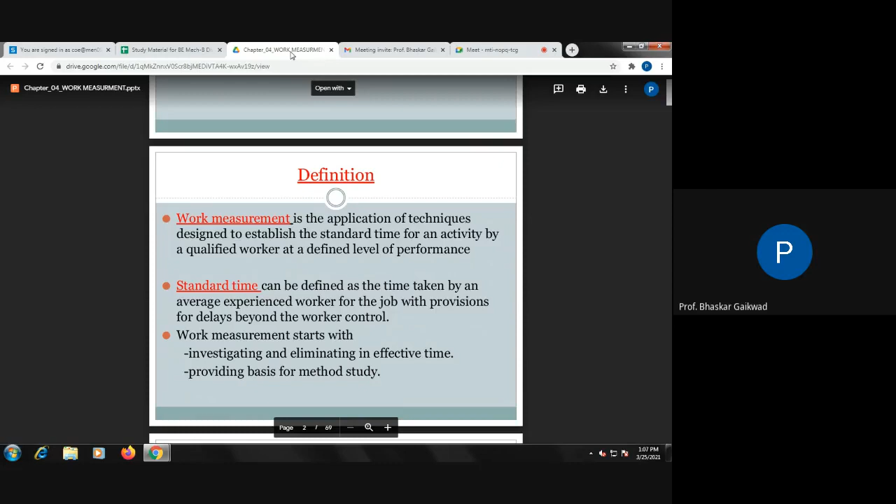So it can be defined as the time taken by average experienced workers. Means you have to give one job to the worker. That worker must be a qualified, experienced worker, and his level of working is 100%. While doing this particular work, you have to measure or calculate this time.

Main objective of work study is to reveal the existence of ineffective time, if any. The downtime or waste time we have to compensate. Set the standard time for carrying out specific jobs and the standard output level. Means, if you set the standard time for this job 1 hour, this job 2 hours, this is the standard, calculated time. Accordingly, you can give work to the workers to complete the job as per the standard time.

So applications: we can use it for estimating the cost, salary, machinery, equipment; whenever we have cost related problems, we can make use of the standard time. Financial part we can decide on the basis of this, incentive bonus systems, then production planning and control purposes also. Then where we can apply work measurement: it is widely used where work is repetitive. If mass production is there, we can make use of this.

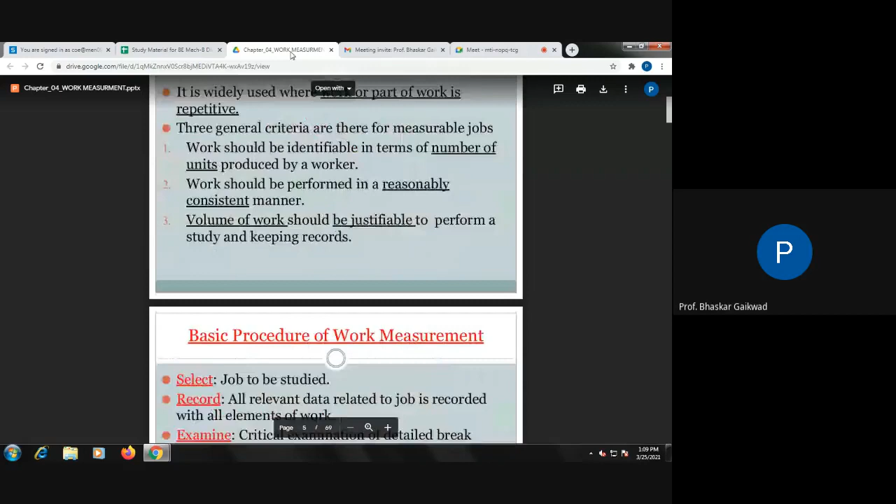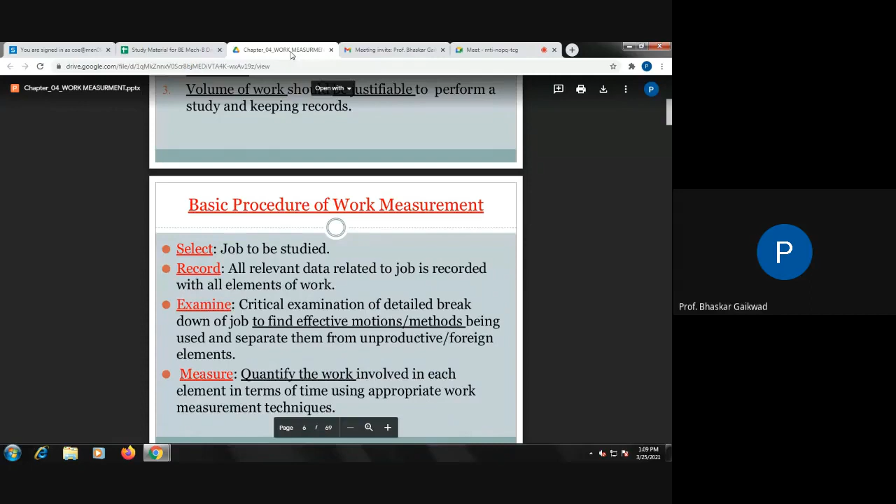Next, the three general criteria for measurable jobs: the number of components produced by the workers, the worker should perform in a reasonably consistent manner, then volumes and keeping a record of the same. After this, the basic procedure: you select the jobs to be studied as usual in method study, record the existing methods, critical examination, measure with qualified workers, then compare with the basic. After that, install it, and after installing you have to record this.

So after that we came to the next part, the techniques of work measurement. But before that, once again I will repeat what we have studied in work measurement. What is the definition of work measurement? Then what is the objective of work measurement, and what is the basic procedure for work study? And after this,

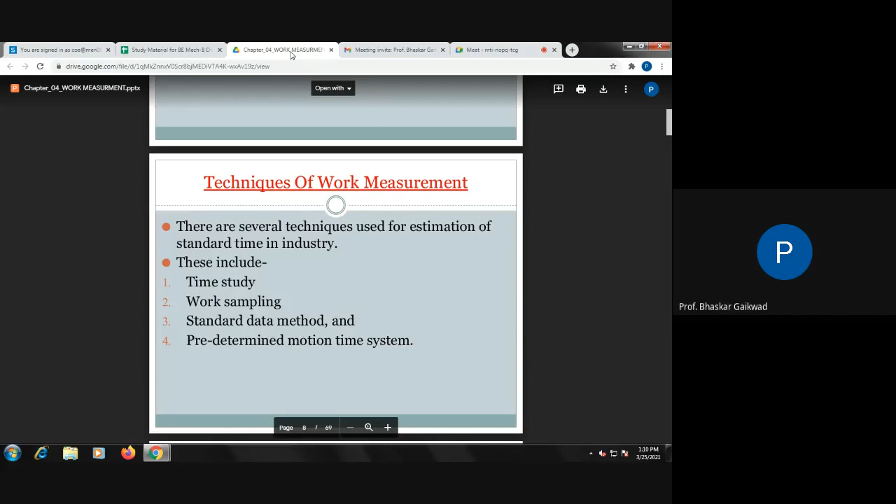the next part, that is the techniques: time study technique, work sampling technique, standard data technique, then predetermined motion time systems. So here in time study we can use the stopwatch system. Work sampling we can use for mass production. Standard time method is there. Analytical methods might be there. Then predetermined motion time systems: each motion time has already been decided, and we can use that for this.

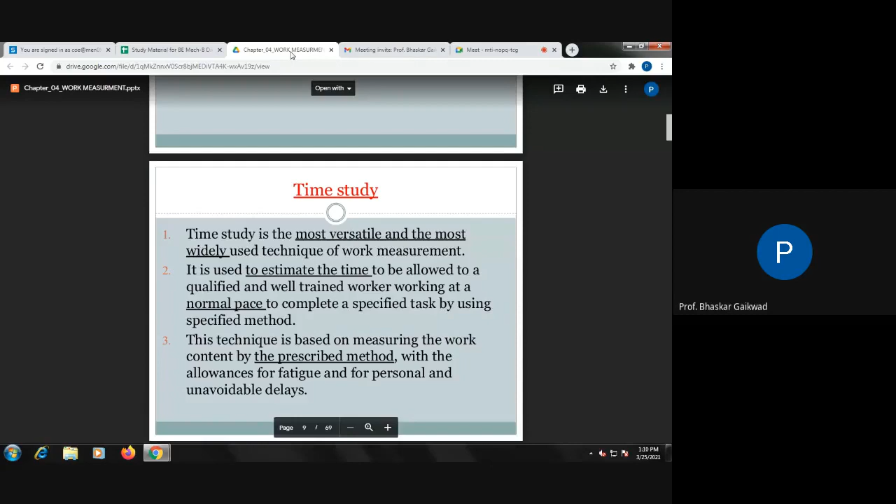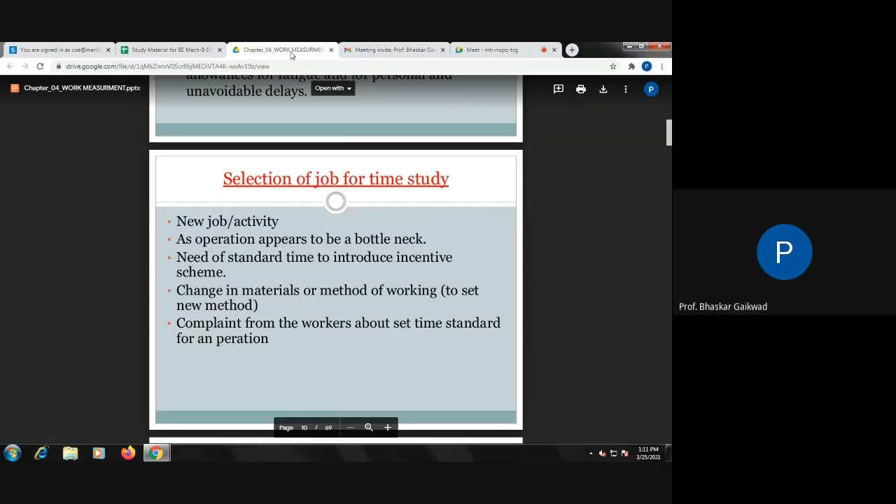So here in time study, two types of watches are there. With the help of this we can measure the observed time. So here, the selection of jobs to be studied, where we can select jobs for work measurement: new activities, mass production, some problem in production, need to decide the salary of the workers, changing the materials, complaint from the workers. Whenever a critical part is there, we can make use of this time study.

Normally we can use this time study for new jobs or new activities, or when in production there is a problem. Whenever a problem is there we can use time study. Then if you want to introduce an incentive system, bonus system, need of standard times, sometimes if you want to change material and methods, then this time study is required.

Complaint from the workers about the set time standard for an operation. Suppose a knurling operation is there, slow time is there. Then in taper turning, slow time is there. But as per standard time, the given or calculated time is less, then there may be a complaint from the worker. And under this situation, we can make use of the time study.

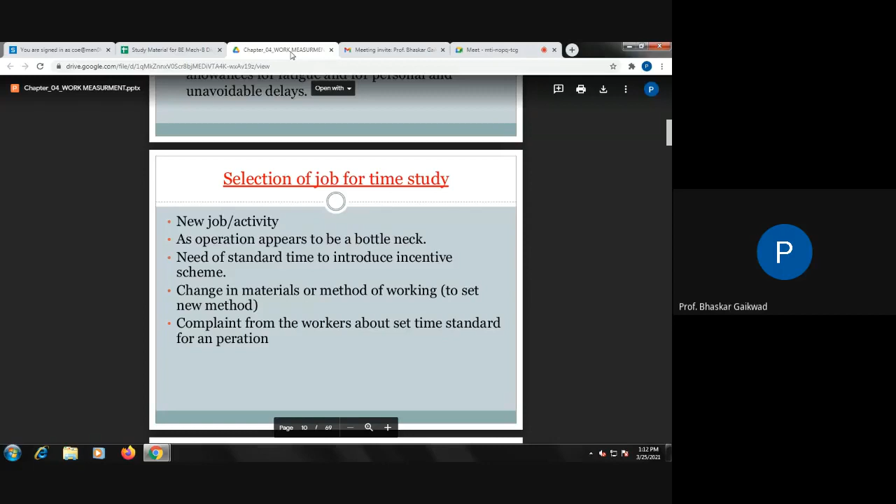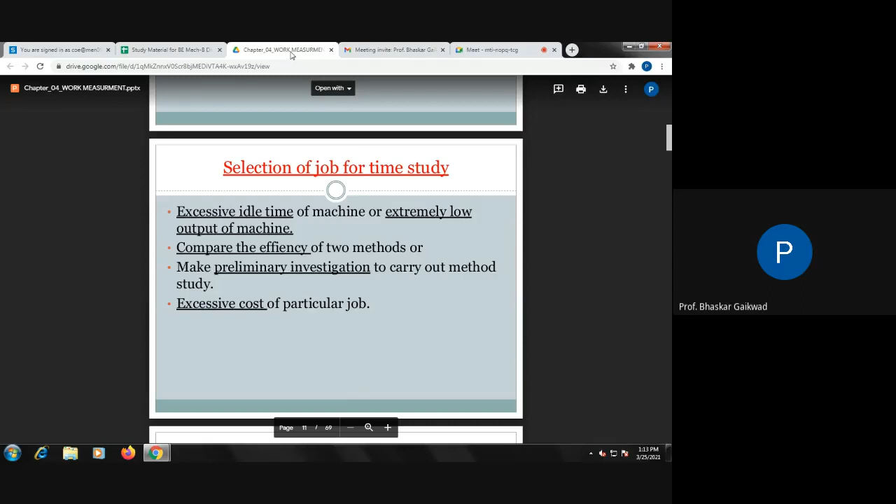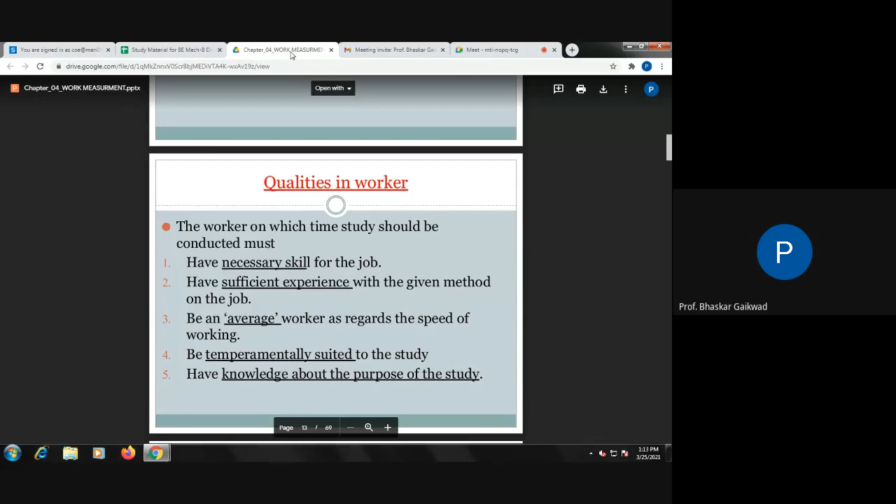Selection of the worker for time study. Selection of worker for time study is a very important factor in time study. He should be skilled, experienced, high level of performance should be there. Quality of worker, skill should be there, sufficient experience should be there, temperamentally suited to the job, knowledge about the purpose of study. So skilled person, experienced person, and knowledge about the time study - such persons are required in the time study.

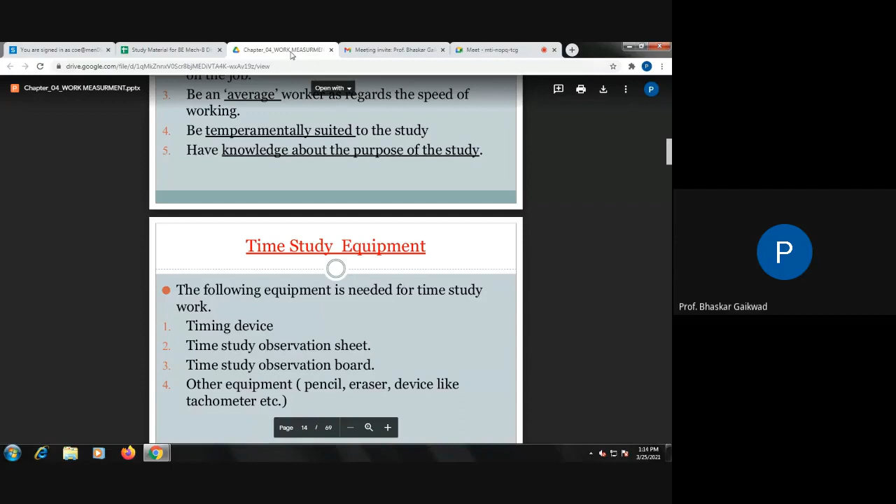Time study equipment, time study devices. That is our stopwatch, observation sheet, time study observation board, equipment like pencil, eraser, devices like tachometer.

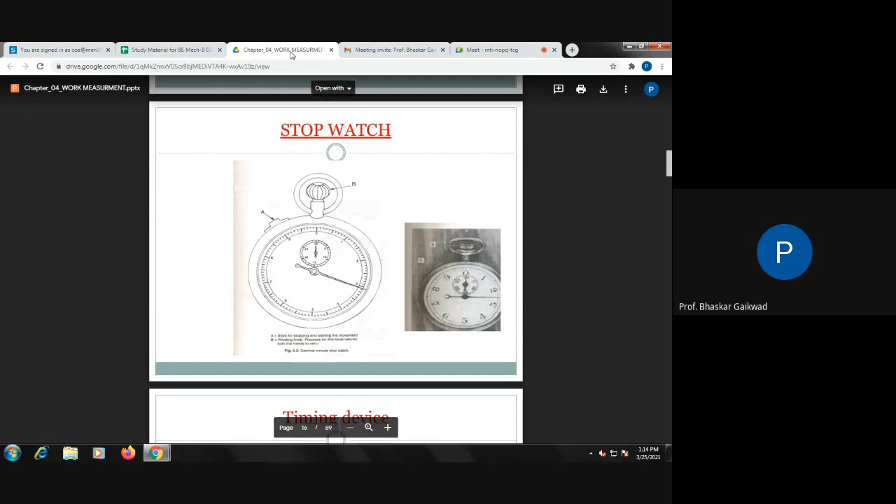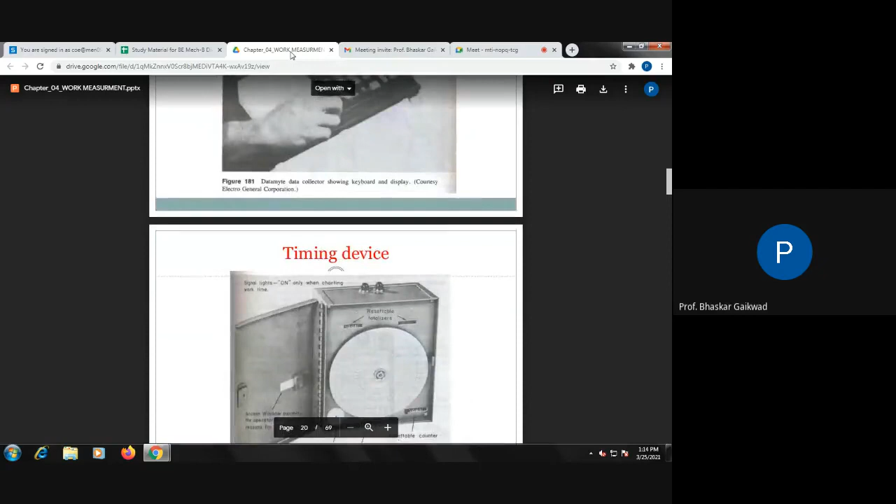This is the digital type. This is the timing for predetermined motion study. This is also a digital timing device. Sometimes this is the time study sheet.

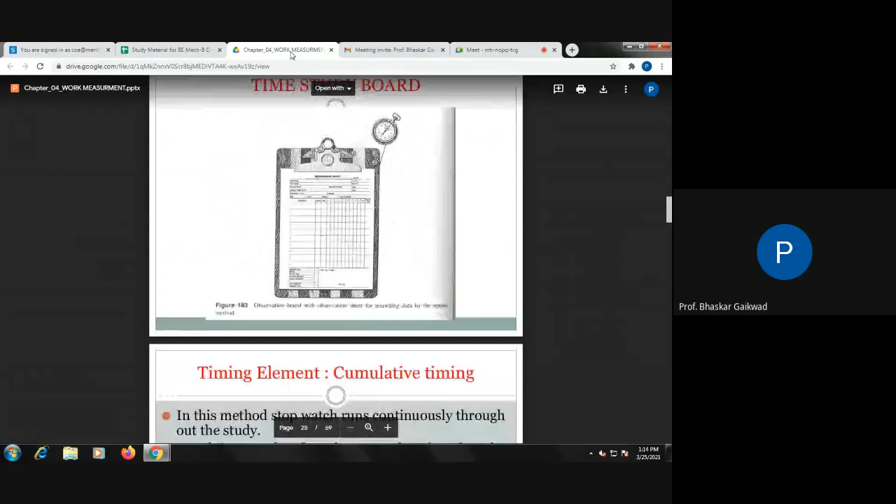Already we have recorded, we have gone through this cumulative timing. Sometimes while taking the reading, the pointer will move. Once it moves, that activity gets over, then it will come to zero. Sometimes from that point, cumulative readings will get measured.

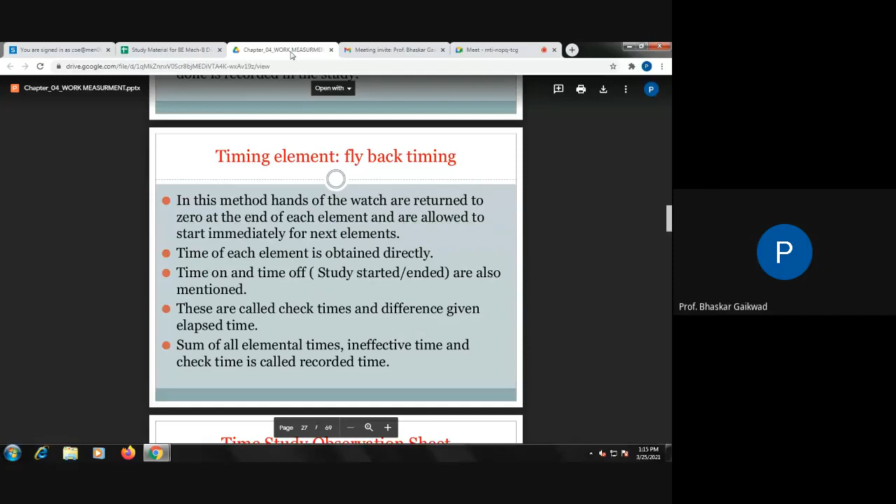Flyback. In this method, hands of the watch return to zero at the end of each element. Once it is over, then it will return to zero.

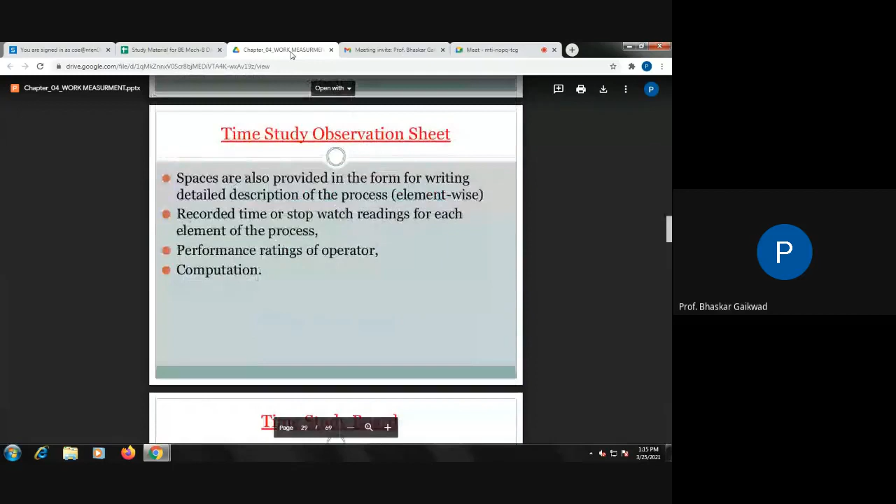So like this, time study observation sheets, drawings, etc. are required in time study. Observation sheet is there already - I have shown this procedure already. We have shown this related job.

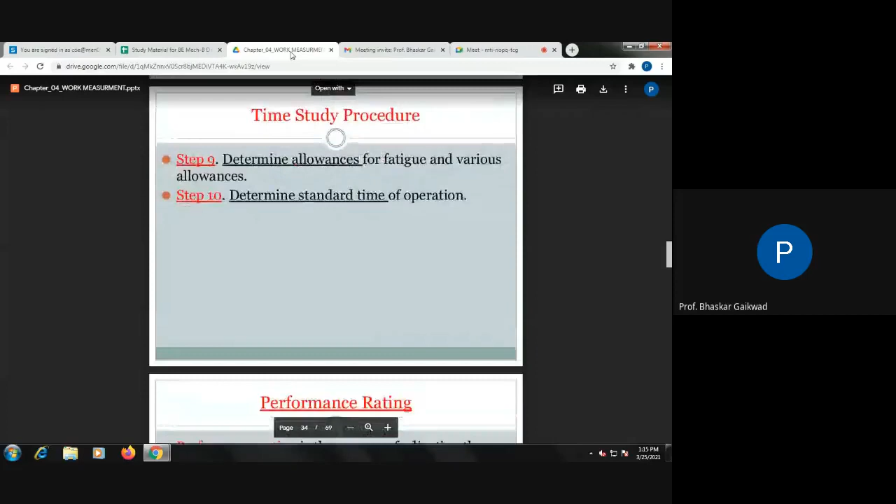Okay, so now we came to performance rating. In short, what we have studied in last lectures: definition of work measurements, then where we can do these work measurements, what is the procedure of work measurements, what are the basic techniques of work measurements. This part we have already covered in the last lecture.

The definition - it is one of the techniques for measurement of standard times by a qualified worker, an experienced person, high level of performance. Main objectives are cost estimation, incentive, production planning and control, to avoid bottlenecks, to remove downtimes in industry, bonus system is there. For this purpose, we require work measurement.

And the procedures - first you have to select the job. After that, you can go for the questionnaire or measurements related to these jobs. Once it gets compared with original and new methods, we can install and record what is the output. This is the procedure.

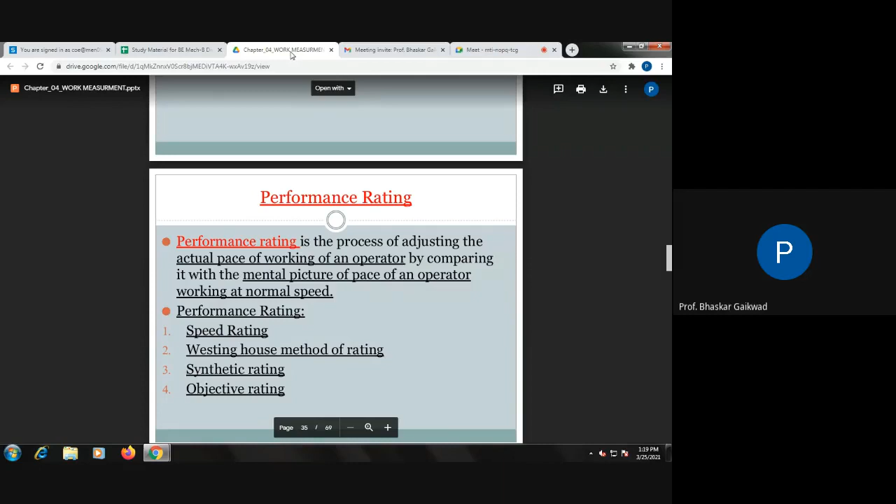So sometimes depending upon objective, depending upon analytical methods, depending upon speed of working, we can decide the performance. But we have to suppose an ideal man, and his performance is 100%. So this is the performance rating.

For example, if a man is doing a job on a lathe machine for 1 hour, one skilled, experienced person working at normal speed will complete 10 jobs. If nobody makes more than 10 jobs within the 1 hour, then we have to suppose that person has 100% performance.

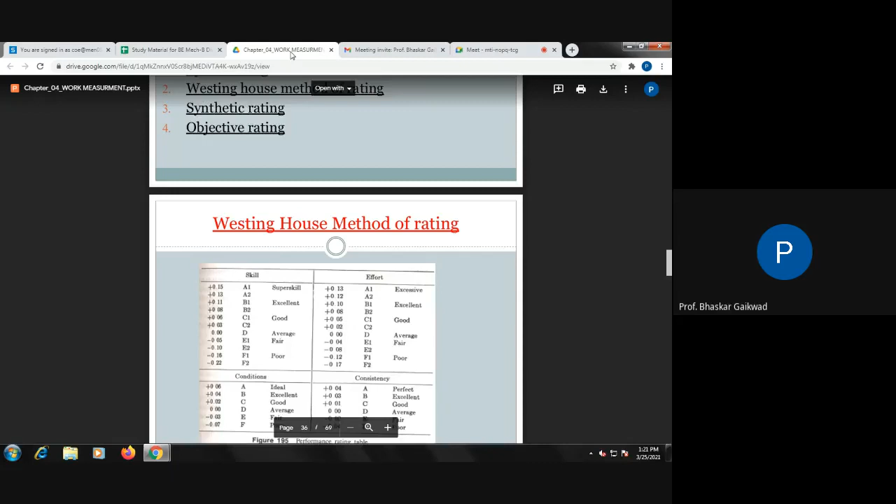This sheet shown on screen is not that much important, but industries make such sheets while calculating performance: poor, fair, average, good, excellent, super skill, like this. Some points are actually required in industry.

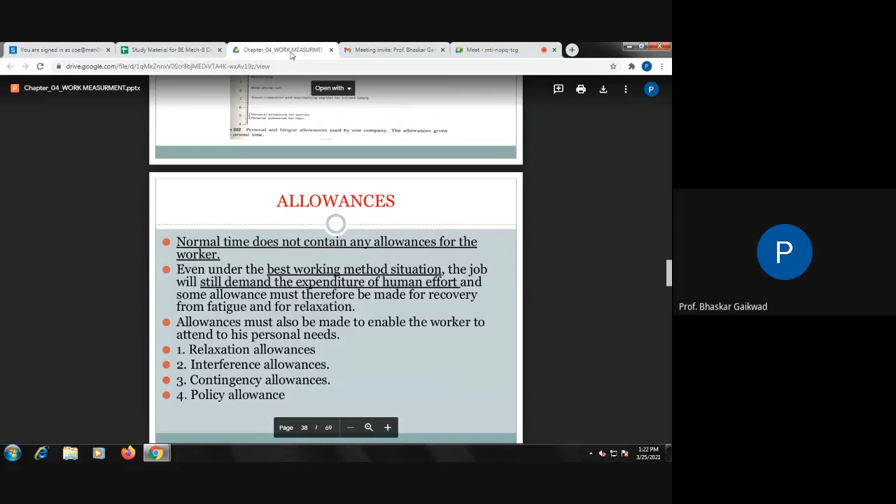This is also about personal and fatigue allowance. So many allowances are given, though it's not actually visible here. After this, on the same page, whether in small handwriting or printed copies, below this the same thing is there: allowances.

So first we've seen the performance rating. Performance rating depends upon the skill and experience of the workers. We can decide the performance rating. The ideal person having good performance, we suppose has 100% performance rating.

Now, in order to calculate the standard time, as in the last lecture, we can use the stopwatch method for mass production level problems. Whatever time is measured by stopwatch is the observed time. If you multiply the observed time by the performance rating, always in percentage, you get the basic time or normal time.

If we add allowances to this, what is allowance? It means extra time given to the worker to fulfill their personal needs. Sometimes power in the industry gets cut, and that time gets wasted. To compensate for this time, we also consider it while calculating standard time. Some management groups have meetings, etc., so policy allowance is also required. So allowance means the extra time allowed to the worker while calculating standard time. Many allowances are there.

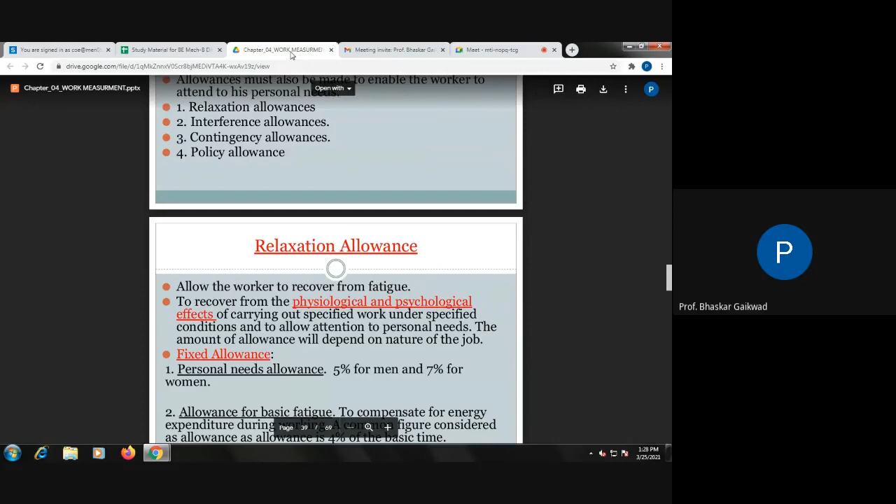Allowance for basic fatigue, to compensate for energy expenditure in the work - the common figure considered as allowance is 4% of basic time. So fatigue allowance, how much we actually require, that is 4% of basic time or normal time.

And how to calculate basic time or normal time? Observed time multiplied by the performance rating. So basic time or normal time, once again I will repeat, is equal to observed time into the performance rating. Okay, so once we calculate, it becomes normal or basic time.

In percentage of this, we can add the allowance - maybe personal allowance, fatigue allowance. Fatigue allowance is normally 4% of basic time.

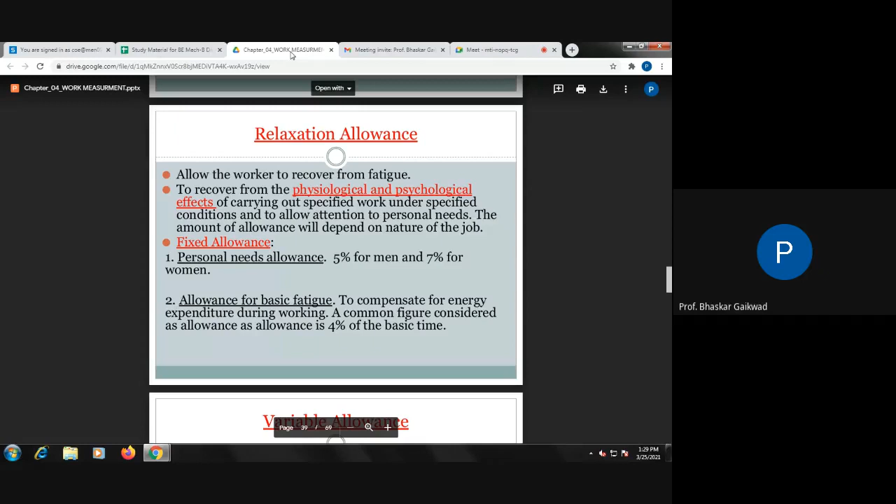Variable allowance is allowed to operators working under poor environmental conditions. Those workers working in poor environmental conditions - heat treatment, foundry conditions that cannot be improved - have added stress and strain in performing the job. Heavy lifting, forging, casting, heavy machine jobs are there. So here variable conditions exist, and we require certain variable allowance.

Variable fatigue allowance is added to the fixed allowance to compensate the operator who is engaged on medium and heavy jobs working under such conditions. The amount of variable fatigue allowance varies from organization to organization - it is 2 to 3% of basic time.

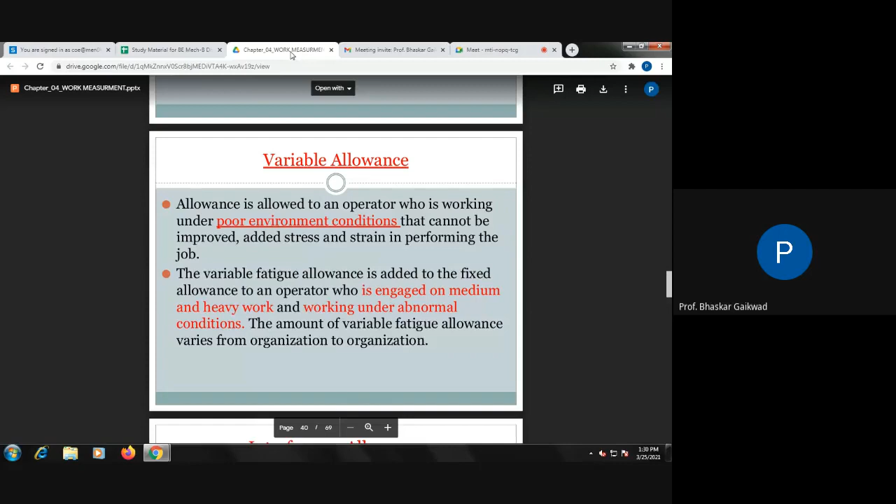Sometimes the environmental conditions will get changed in the organization. Depending on the opinions of the top management, we can allow this allowance.

Interference allowance: work content of job to compensate the operator for unavoidable loss of production due to simultaneous stoppage of two or more machines being operated by him. Suppose 4 or 5 machines are there and one man is working on those machines. So the third machine will get stopped, and the fourth and fifth will not work unless the maintenance work gets done. Under such a situation, we can add interference allowance.

Interference means there is a problem - suppose one worker is operating 2 or 3 machines and one machine stops working. It is not the fault of the operator, it is the fault of the machine. So here the operator cannot do anything. This time actually comes under the interference allowance.

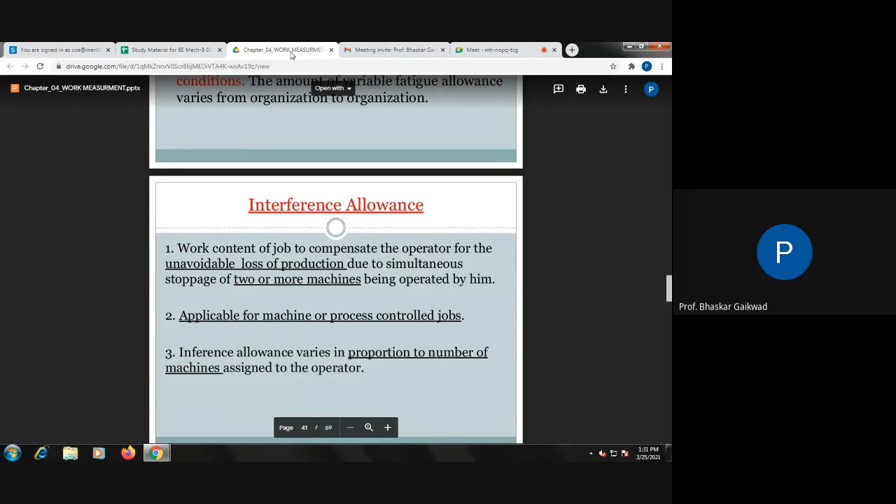Applicable for machine and process control jobs. Interference allowance varies in proportion to the number of machines assigned to the operator. This is also dependent on management - maybe 2 to 3% interference allowance.

Then contingency allowance - that means unpredictable, immediately without any intimation, the work will get stopped. So this is called contingency allowance. Power getting cut off - this is contingency allowance.

Then sometimes there is a force from top management to stop and come for a meeting - unpredictable things will happen. Then it is called contingency allowance.

It's a small allowance of time to meet legitimate and expected items of work or delay, precise measurement of which is uneconomical because of their infrequent or irregular occurrence. This is an irregular occurrence - small unavoidable delay as well as occasionally minor extra work.

Unexpected things will happen - this is the contingency allowance, and it should not exceed 5%.

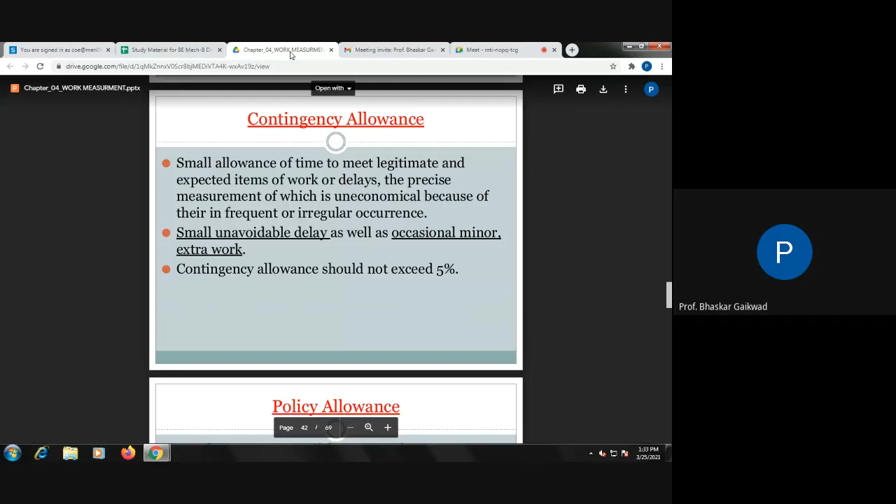So contingency allowance is 5%. If you are deciding the standard time for a job, power may get off or not, even so we can consider 5% for unexpected things happening - unexpected events that are not in the worker's hand. Examples already given: power may get off, how will the worker work? So this comes under contingency allowance - it is 5% of normal time.

Policy allowance. Now this policy allowance is actually a management allowance, not a genuine part of the time study. It is not added in the standard time. Sometimes questions will be there asking which allowance is not added in the standard time. So policy allowance is not added in the calculation of standard time.

It is used to line up the standard times with the requirement of wage agreements between the employers and trade unions. So we require this policy while deciding the salary or wages system, when there is a need of discussion between the employees and top management or trade unions.

A policy allowance is an increment, other than bonus increment, applied to standard times to provide a satisfactory level of earnings for a specified level of performance under exceptional circumstances. The policy allowance we normally use for incremental purposes, bonus systems, or the additional things the workers get in the financial part. Then we can say there is a policy. It actually depends upon the management. It is not related to standard time.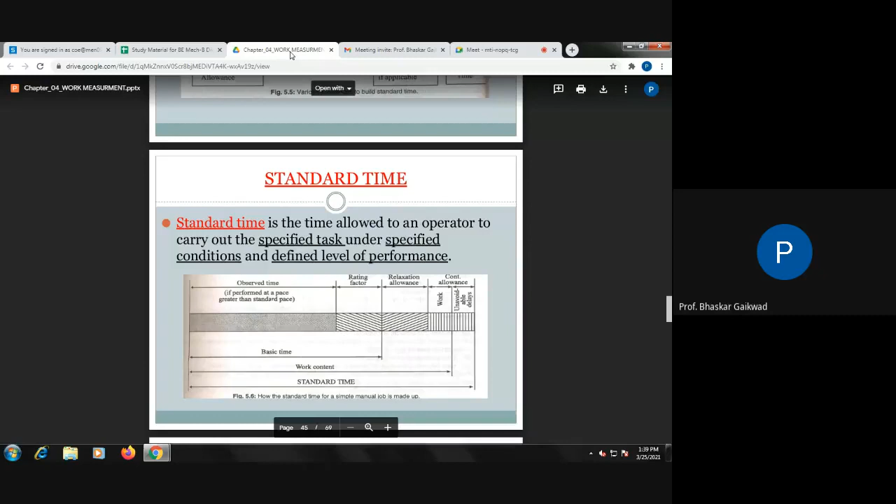Here observed times and rating are given, and after this come the problems. But before going to the problems, once again we go back and we'll see

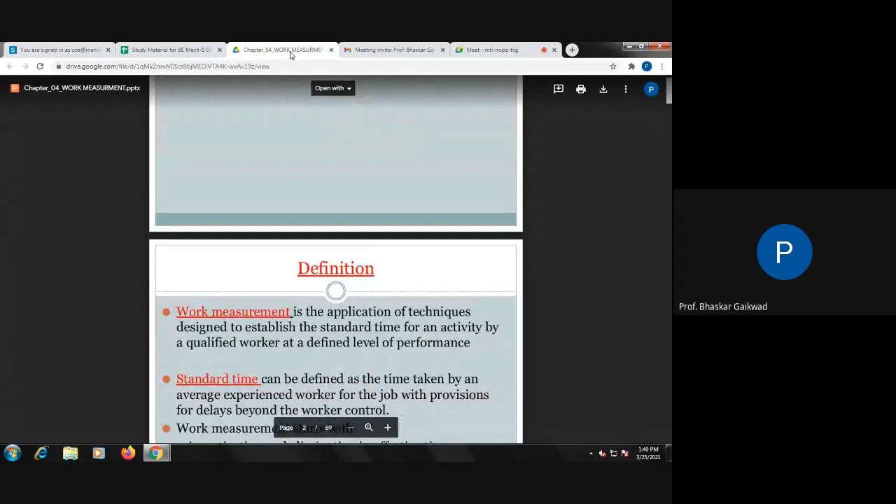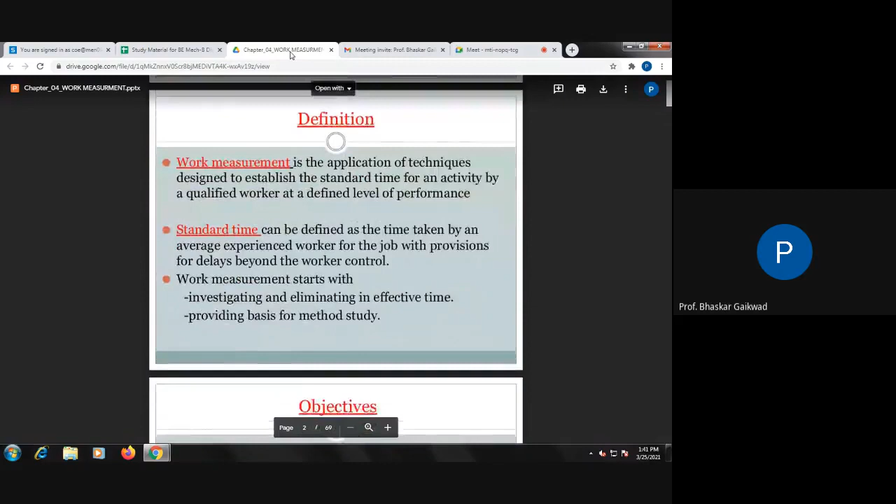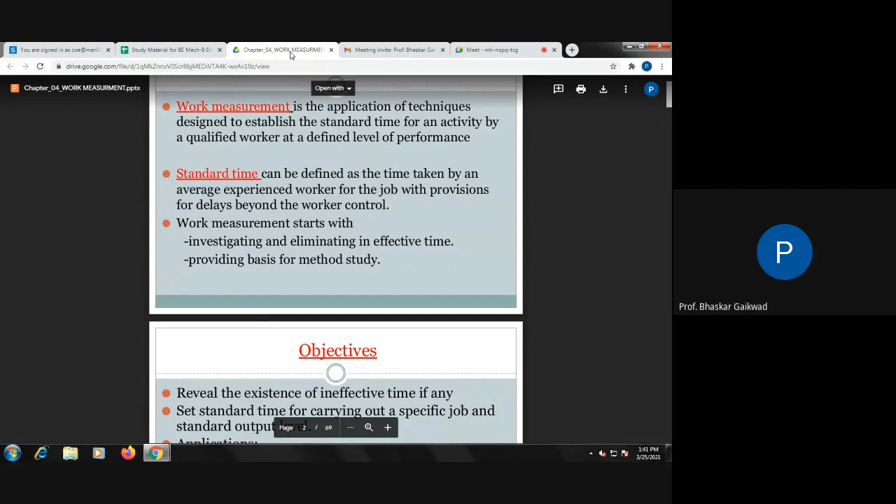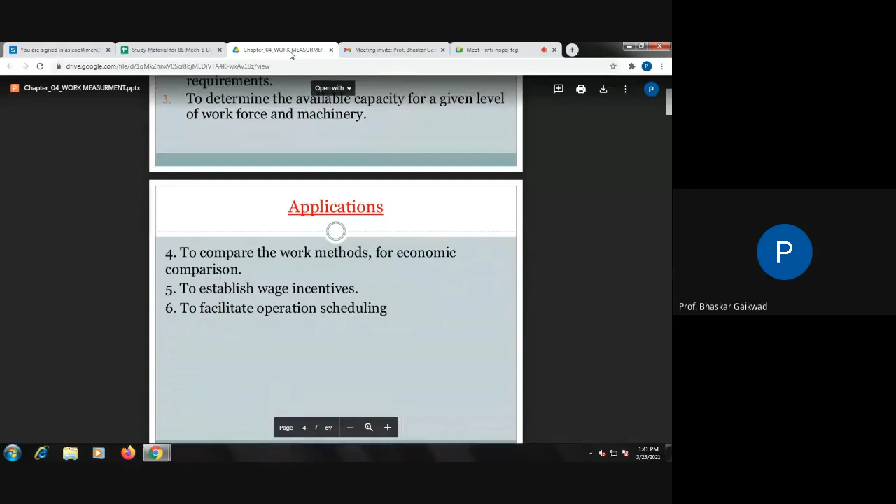the definition of work measurement, then standard time, and the objectives. Very simple objectives: we require it for cost estimation, to decide the salary of workers, to avoid bottlenecks, and to establish new methods. Okay, so these are the objectives. For economic comparisons and break-even analysis also we require this.

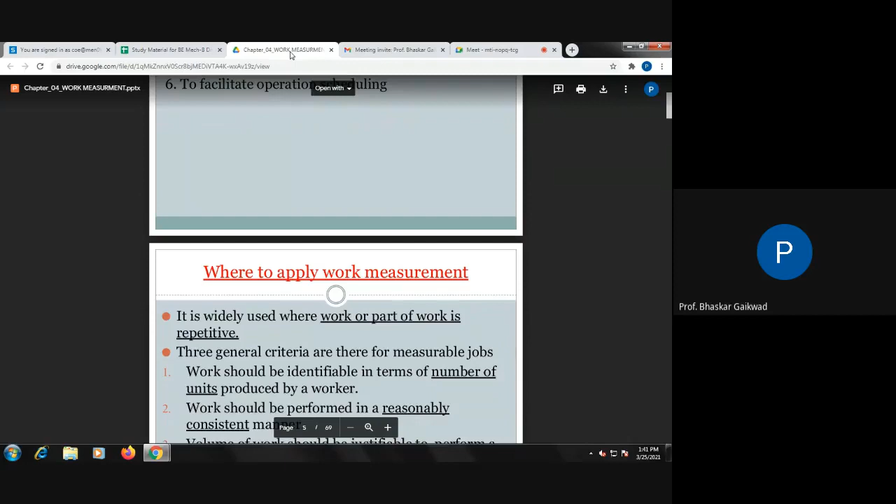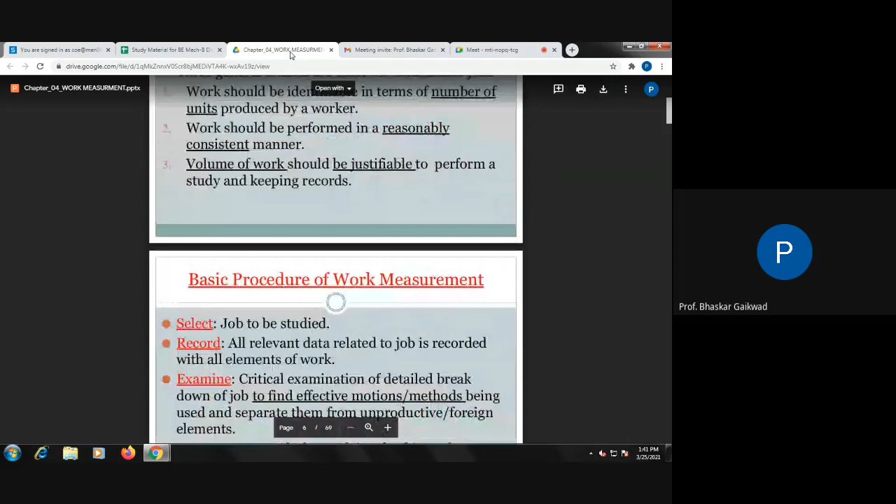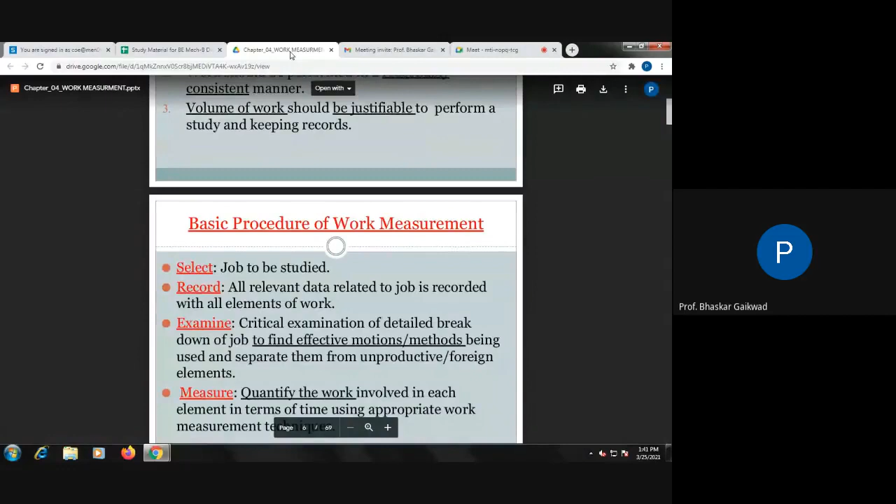Where can we apply work measurement? Whenever repetitive mass production work is there, new work is there, or the volume of work is large, it is suitable. The basic procedure is the same as method study: select the job, record the existing method, examine with critical questions, measure it, then compare with other methods, define and install it, and evaluate.

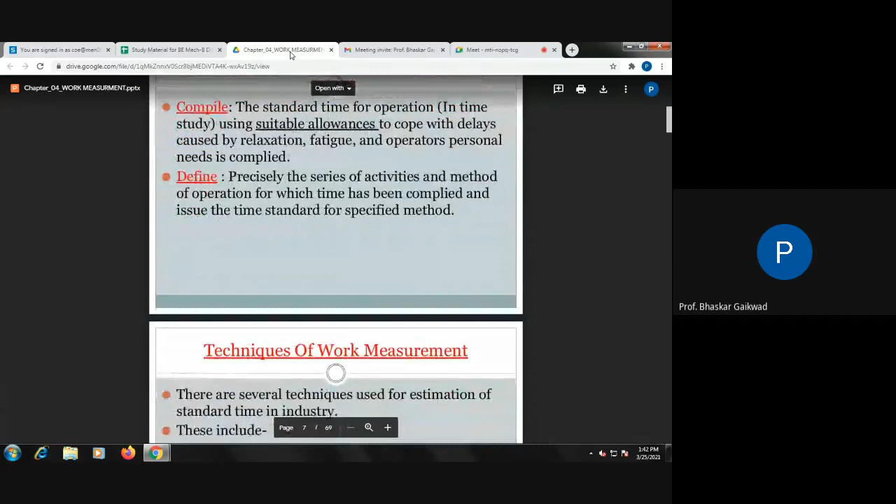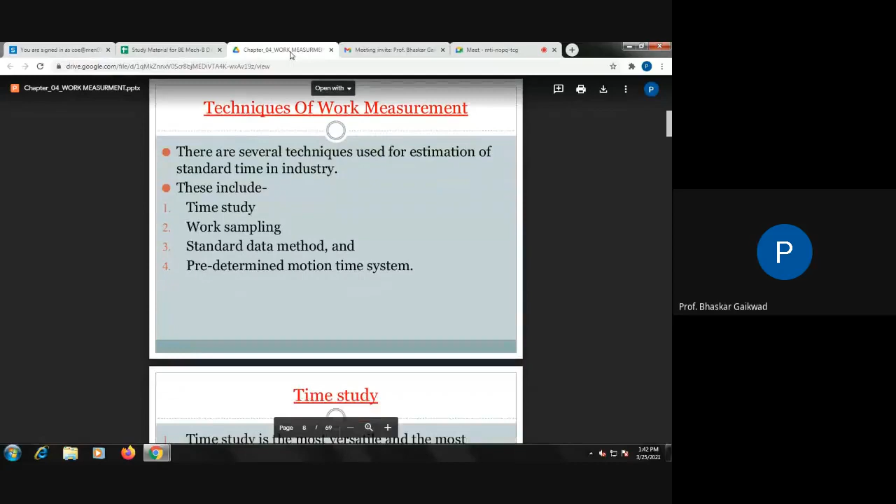Techniques: time study, work sampling, standard data, predetermined methods. So these are the techniques. In time study, two types of watches we can use, and whenever a repetitive job is there, we can make use of this.

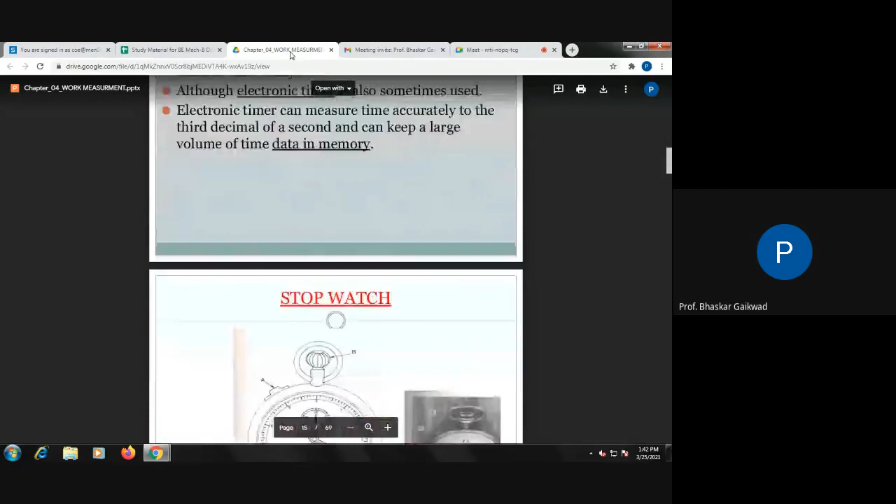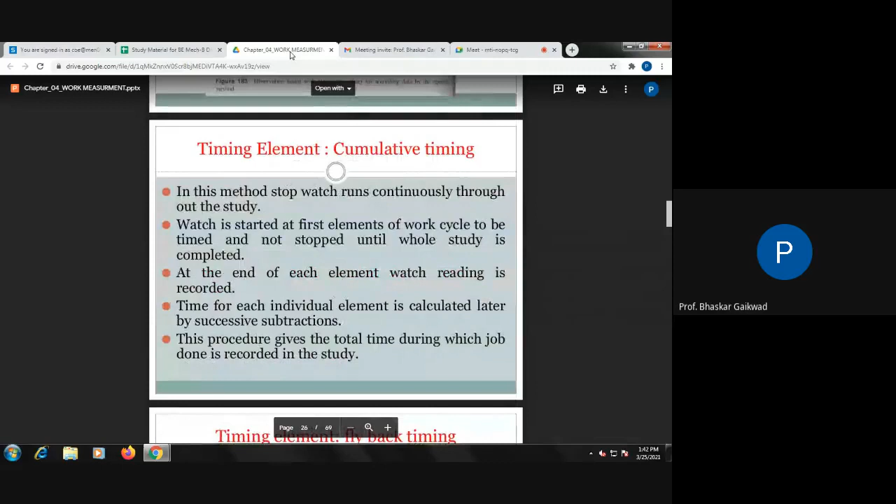Stopwatch, we have seen different types of charts. So this total sheet, this is the example, need not remember this, that's why I am going very fast. Two types of cumulative timings and a fly back timing is there. Observation sheet, study board is required for this.

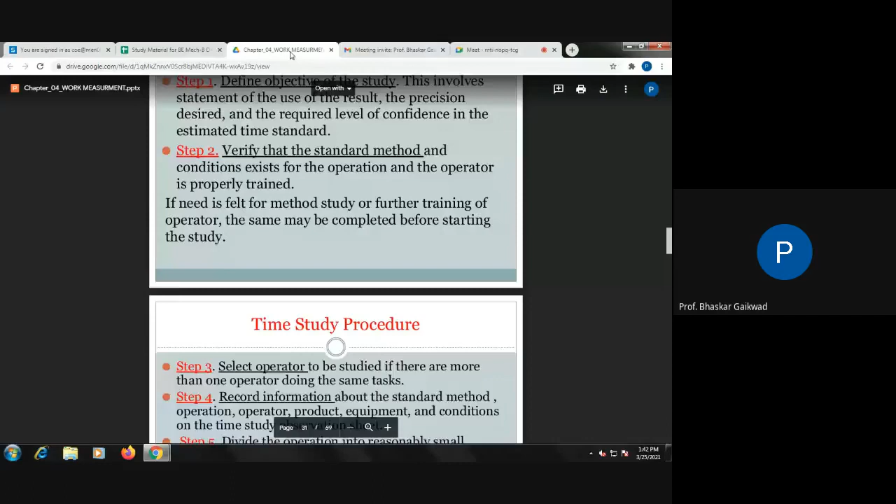Procedure, repetitive parts, performance rating, and here is the allowance. So allowance means extra timing while calculating the standard time. Relaxation allowance means his fatigue, personal need; it comes under the relaxation allowance.

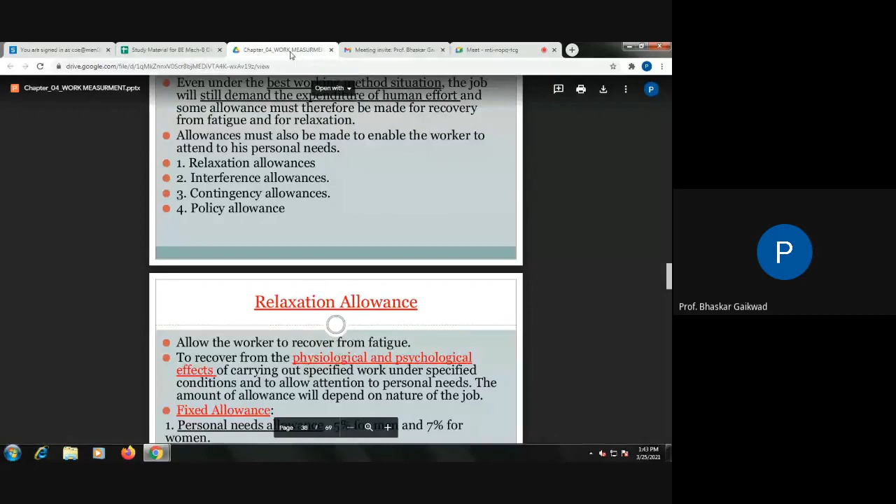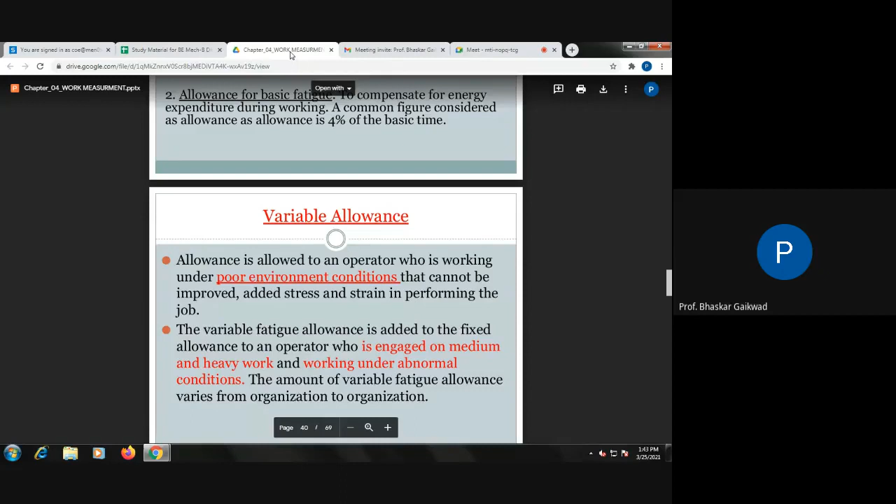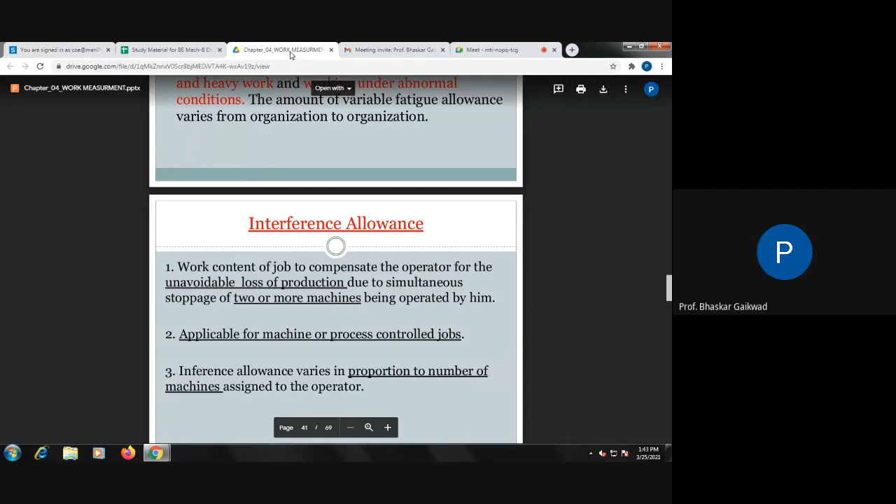Variable allowance: working condition is not good. Morning the condition is different, evening condition different, afternoon condition, so this allowance may get changed. Interference: when the worker is operating more than 2-3 machines, second machine or third machine will get break. Automatically, the other machines will not work. Interference, contingency, policy, examples you have to remember.

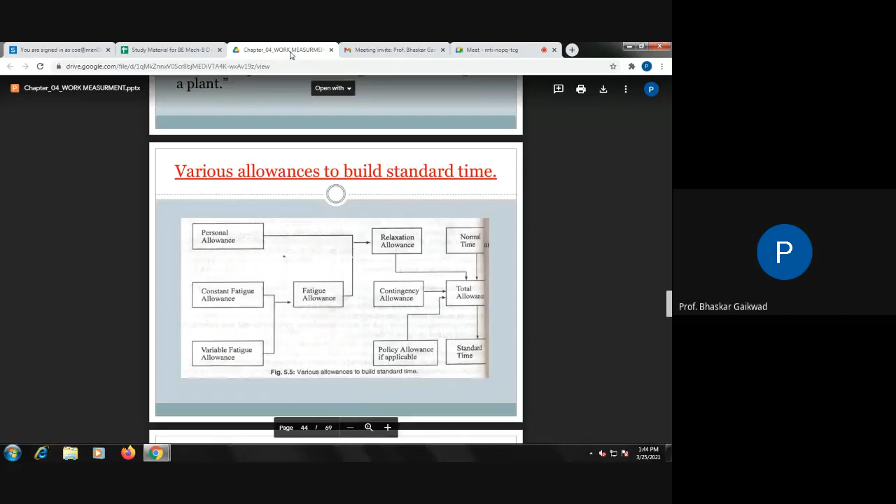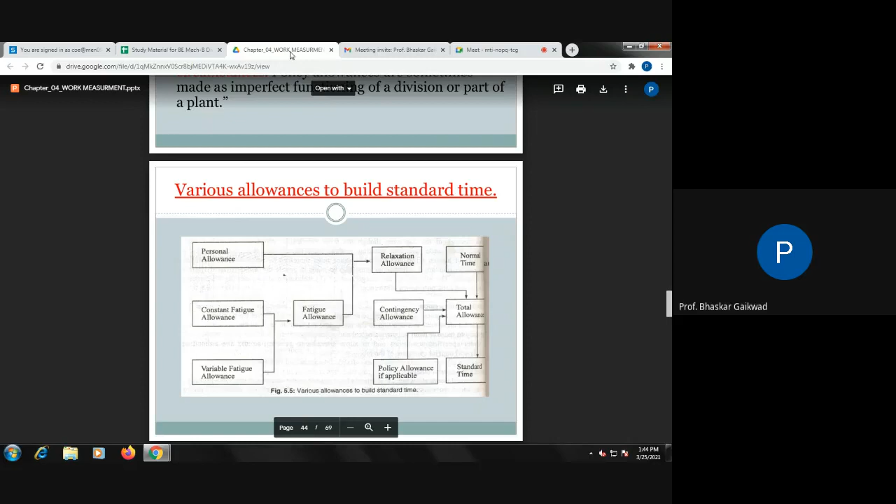Policy allowance is actually in hands of the organizer or the management to decide the increment purpose. It is not part of our standard time. This is actually the allowances chart. Relaxation allowance and contingency allowance are very important while calculating standard time. Policy allowance will not be considered in the calculation of standard time. And here the chart is given how to calculate the standard time.

Then procedures. Here the observed times and performance rating for five elements are given. Here, one activity is going on, for example, machining a job on the lathe machine. So what operation is there? Facing is there, then turning is there, drilling is there, knurling is there, parting is there. Suppose these five operations are there.

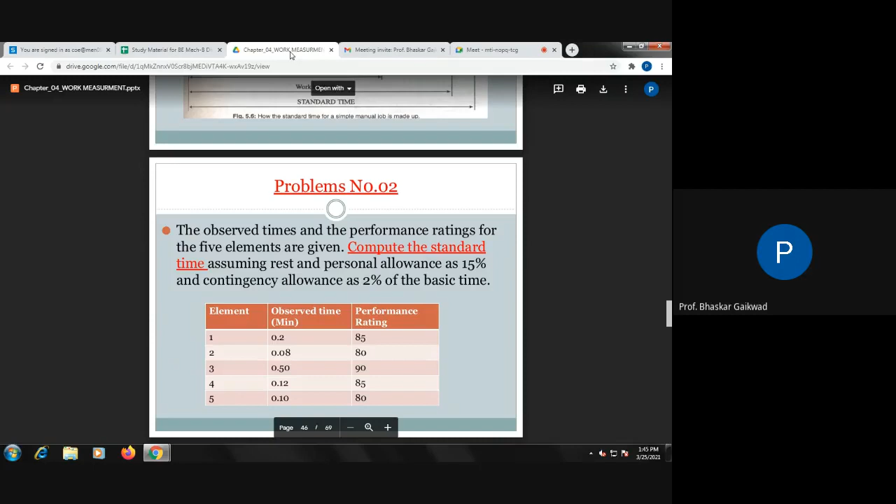For first facing operation, 0.2 minutes are required. The next turning operation, 0.08 minutes is required. The knurling we required 0.50. Others, drilling, we required like this way. So like this, five operations and performance rating.

So here performance rating means, already we have seen, those working at highest efficiency level, means a skilled and experienced person, what he is doing, his work is supposed to be 100%, and below that all workers will be there. So performance rating for first element is 85, then for next that is 80. Means performance level may be 100 or more than 100 or less than 100. Sometimes some persons will work more than ideal condition.

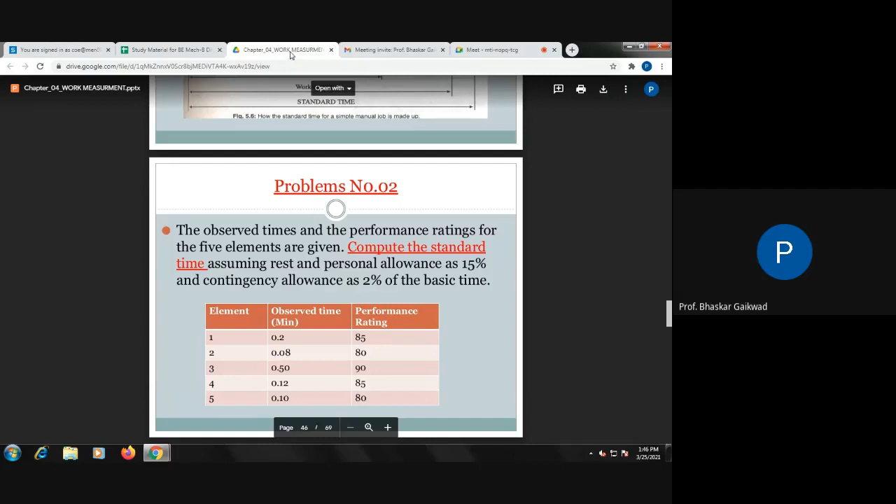Then problem number one: element times for four cycles of operation using stopwatch are presented below. Calculate the standard time for operation. Elements 2 and 4 are the machine elements. For other elements, operator is rated at 110. Total allowance is 15% of the normal time. Now we have to calculate the answer.

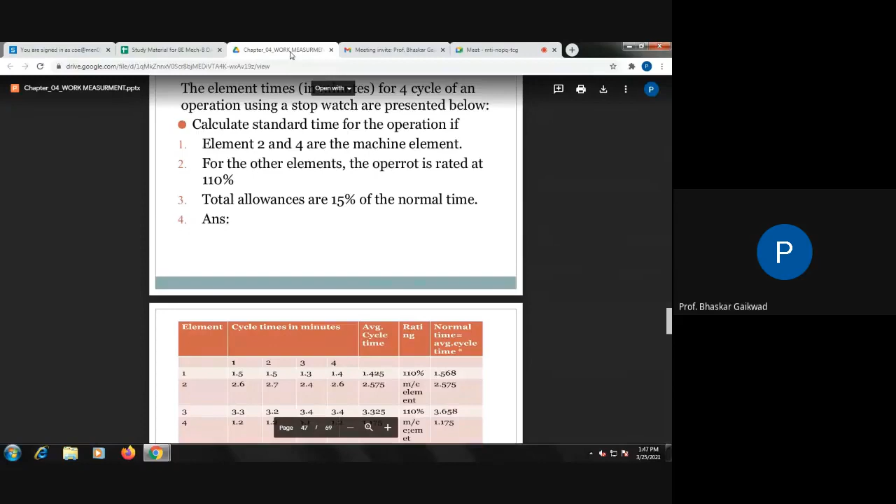So here, how to calculate standard times, through these problems we will come to know. Five elements are there, and the cycle times in minutes for each element. First element cycle times in minutes for four operations: 1.5, 1.5, 1.3, and 1.4. The average cycle time is 1.425. Similarly for 2: 2.6, 2.7, 2. So whatever 2.6, 1.4, these values we will get by stopwatch while doing the work.

So here average cycle times for each element are calculated: 1, 2, 3, 4. After that we can make the total of this average cycle time. So that total is 0.505. After that rating is 110 percent. So for each element you can calculate the normal time. How to calculate normal time? Average cycle time into 110 divided by 100. You will get the normal time 1.568. So all these elements you can calculate this.

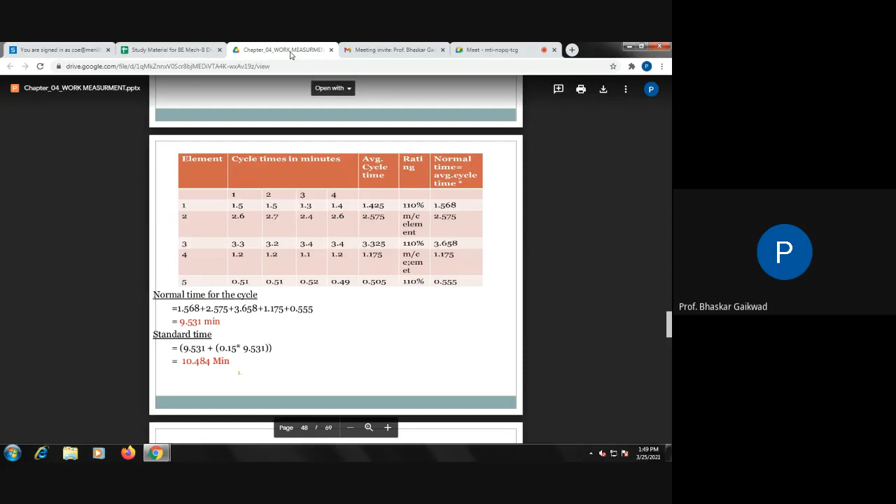So just check how this problem has been solved. Otherwise, tomorrow we'll solve it on the blackboard. Try to understand in what way we have solved the problem. If you are not able to understand, tomorrow we'll solve this on the blackboard. Here it is very simple. Each element, four activities are there. Each activity time is given. We can calculate the average time.

Average time means observed time into performance rating 110 divided by 100, you will get the normal time. So all elements' normal times you can get. Make the addition of the normal times of these five elements. So normal time, that is 9.5, plus 15% of 9.5. This is your allowance, because at the top it is given 15% of normal. So whatever answer you get, that is your standard time required to complete these five activities with the four operations for the job. So up to here it is clear. Anybody having any doubt, you can ask.

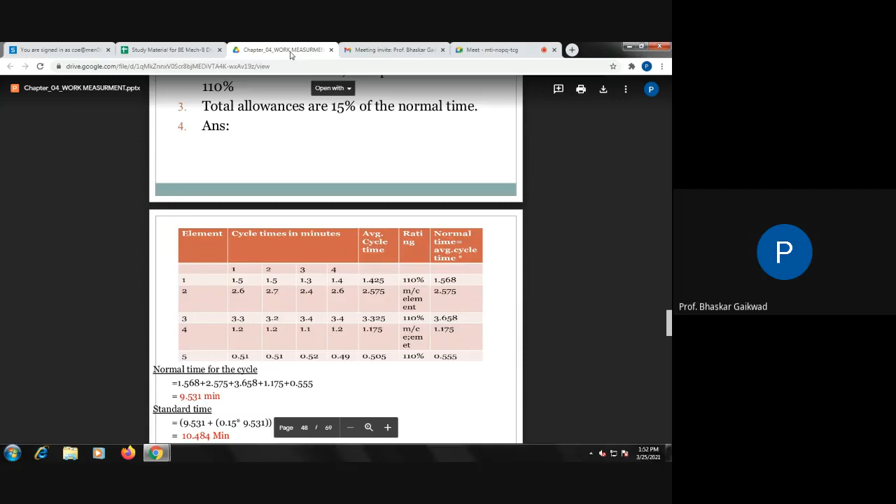So here problem number one we have solved, and here problem two is there. Observed times and performance. So here we can calculate the normal time. How to calculate the normal times here? 0.2 into 85 divided by 100, you will get normal time. Then 0.08 into 80 divided by 100, you will get the normal time. Here personal allowance is 15, contingency allowance is 2, means 15 plus 2, 17. So let us consider the first example.

Observed time is 0.2 into 85 divided by 100. What will you get? Normal time. Okay. Now how much allowance is given here? 15 plus 2, so 17. So whatever normal time you have calculated, into 17 divided by 100. Whatever value you get, you have to add it to the normal time. This way you will get the normal as well as standard time for each element. So only one formula you have to remember.

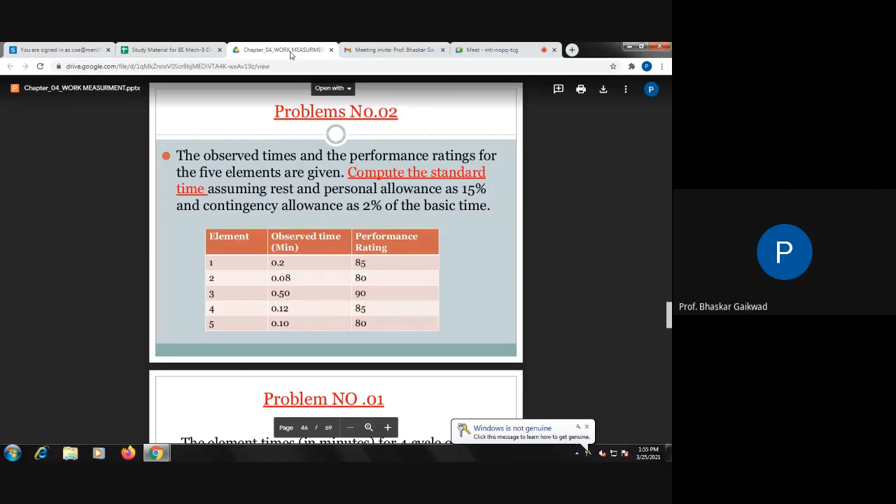So these are the two examples related to standard time calculations. Tomorrow we'll go on the blackboard and solve certain problems on how to calculate the standard time. If it is not possible to understand today, tomorrow we'll go on the blackboard, because here we cannot calculate and show the addition and difference in the PPT. So tomorrow we'll go for actual calculation on the blackboard. The same problem we'll solve.

Okay. So still, anybody having any problems, you can ask me.

Today we have discussed the various types of allowances: personal allowance, interference allowance, contingency allowance, policy allowance. These allowances we have studied, and allowance is always in percentage of basic or normal time. And basic or normal time depends upon observed time into the rating. So this way we can calculate the standard time with the help of these allowances.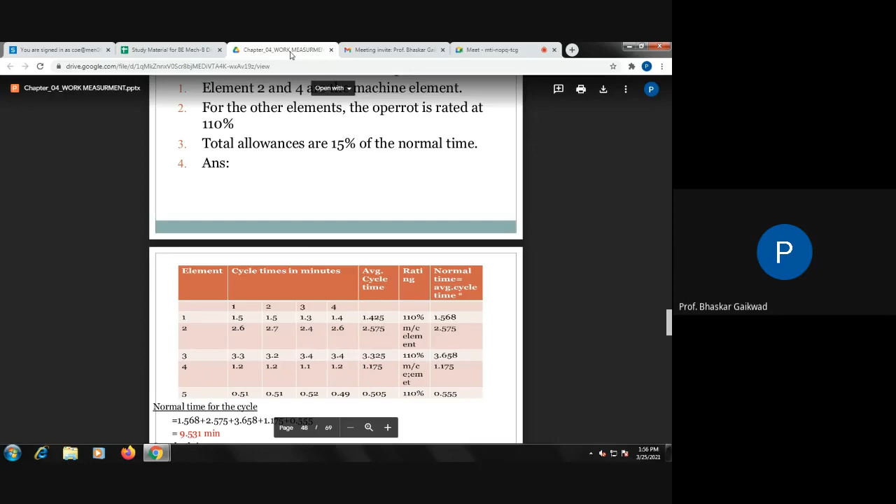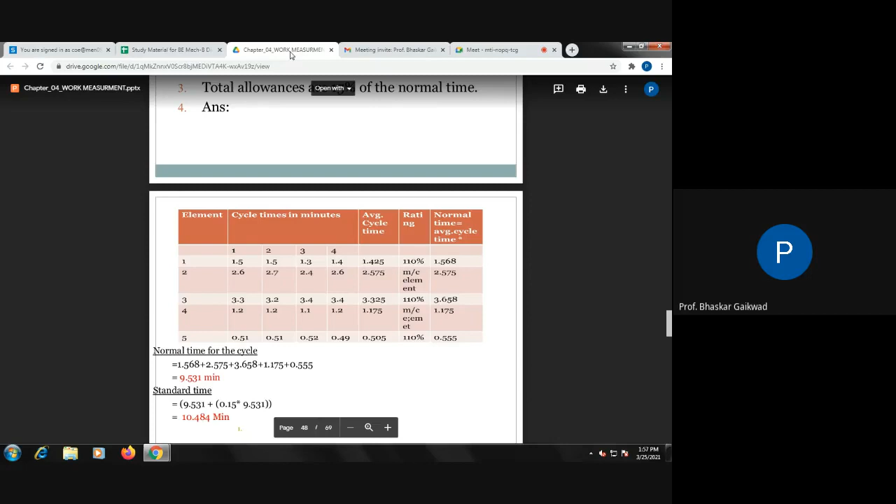Any problems to anybody? No problem. Okay.

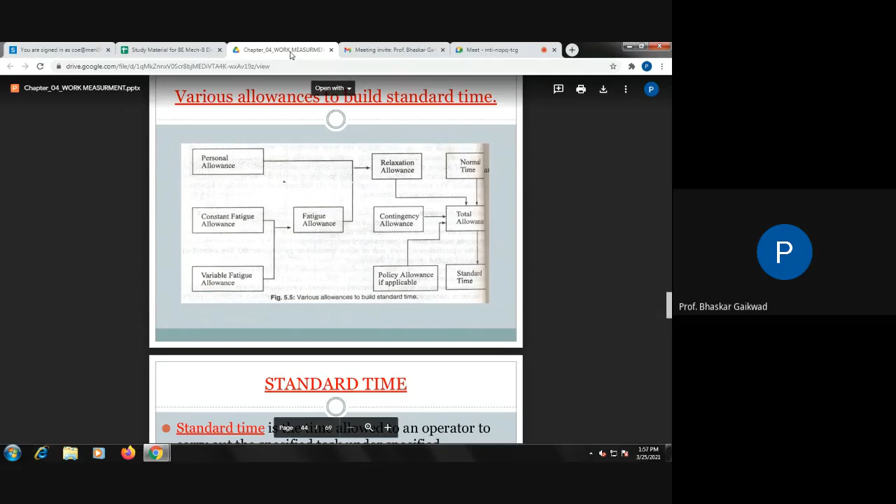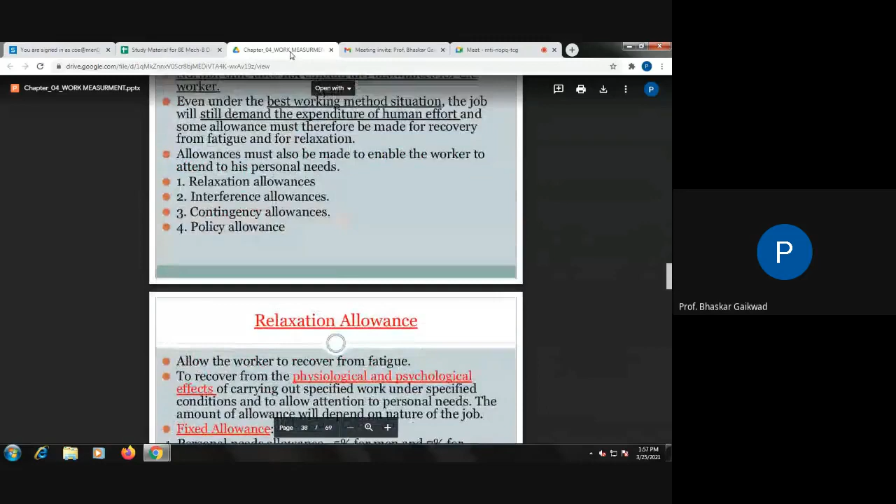So once again recover this point and then we stop. This is very important. Allowances you have to consider: contingency allowance and relaxation allowance, interference allowance, variable allowance. Allowance means extra time that will be added in the calculation of standard time.

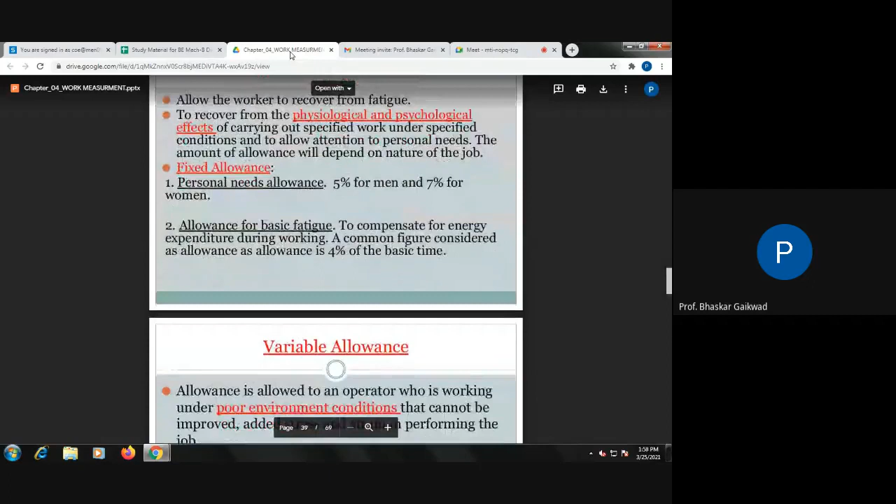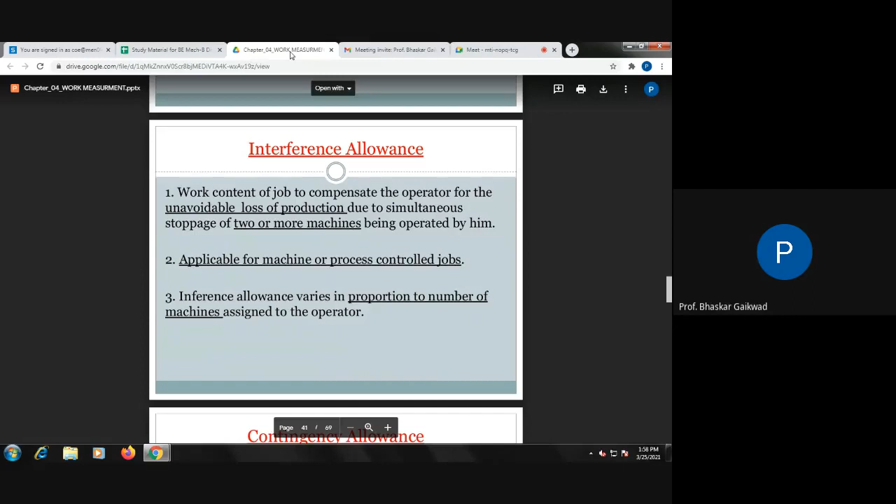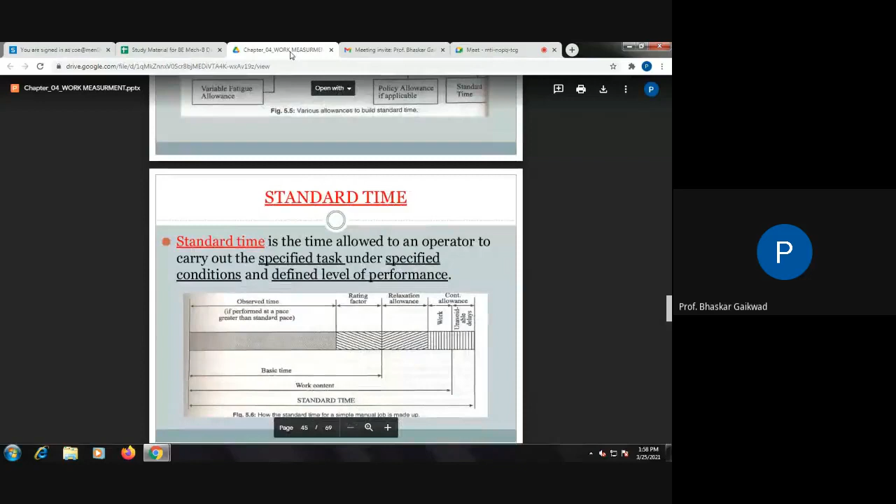Interference allowance is when a worker is working on more than two, three machines, and the third or fourth machine gets a breakdown and maintenance there; we cannot calculate the standard time. Contingency means unpredictable time. Policy allowance depends upon the management. So this is the very important chart. You can take a screenshot of this and remember the standard time chart.